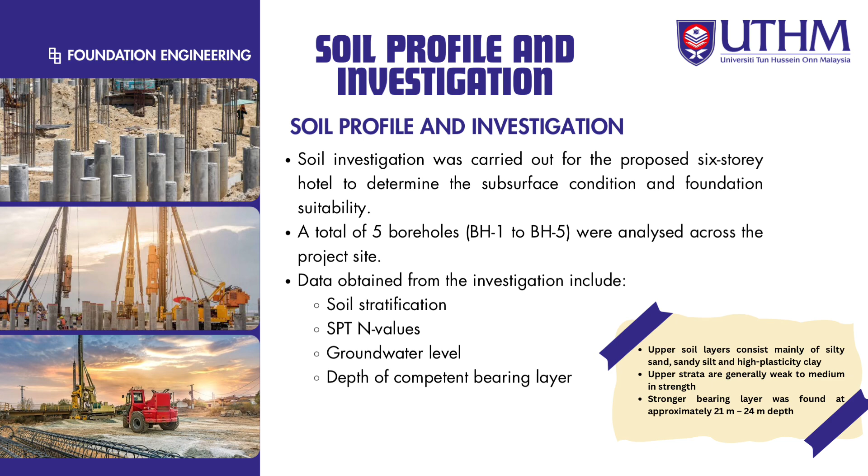A competent bearing layer was identified at a depth of approximately 21 to 24 meters, making pile foundation the most suitable option for the project.

This slide shows the column load and foundation layout. The 6-story hotel is supported by a pile foundation system, with structural load transferred from the column to the pile cap and then to the pile. There are 25 columns with loads ranging from about 755 kN to 5714 kN. To simplify the foundation design, these columns are divided into 4 load groups, labeled P1 to P4.

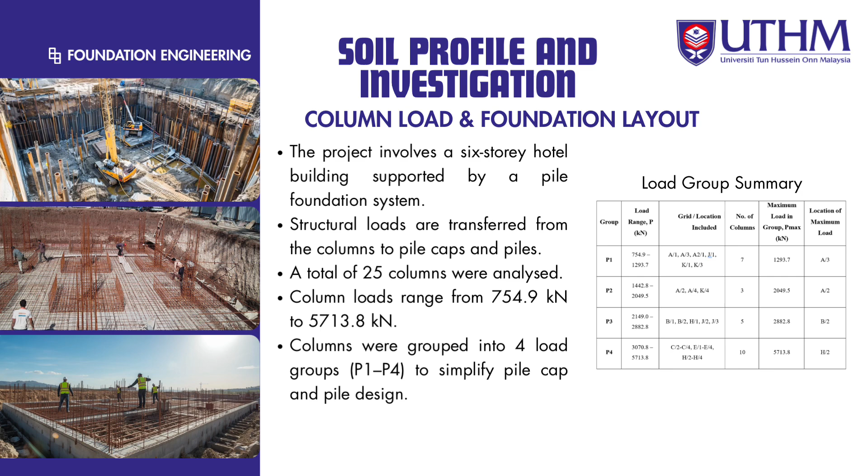This slide summarizes the borehole results. The boreholes show that the site consists of topsoil followed by silty sand, sandy silt, high plasticity clay, and finally dense to very dense sand or gravelly sand at greater depth. Some boreholes record low SPT N values in the upper layer, indicating weak and compressible soil.

However, the SPT N value increased to 50 at deeper depth, confirming the presence of a strong bearing layer. The competent bearing layer was encountered between 21 and 24 meters, which supports the selection of pile foundation for the project.

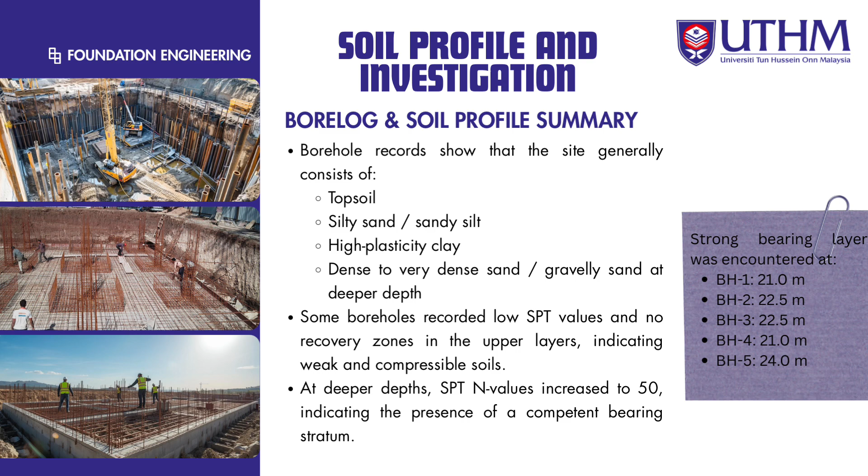On this slide, I will explain the design methodology used for our pile foundation. We selected the Meyerhof method for sand because the site investigation showed that the pile will be founded in dense granular soil. This method calculates the ultimate axial load capacity of the pile by considering two main resistance components.

The first is the end-bearing resistance Qp, which is developed at the pile tip, and the second is the shaft friction resistance Qs, which acts along the embedded length of the pile.

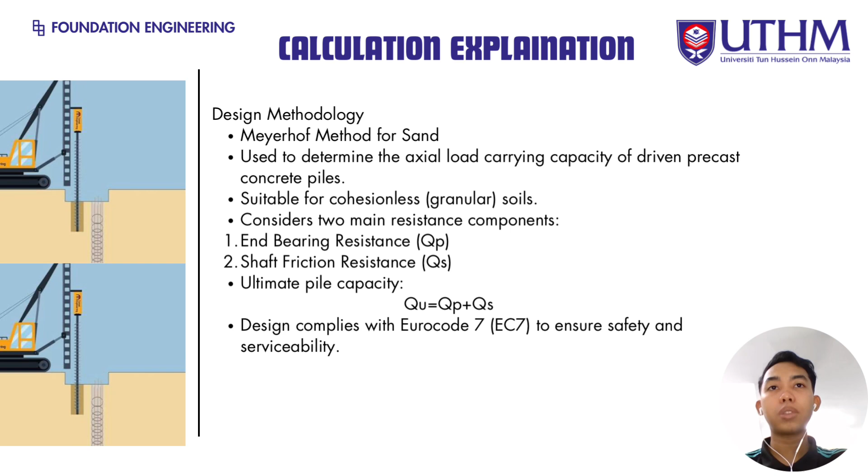The total ultimate pile capacity is obtained by adding these two values, where Qu equals Qp plus Qs. In addition, the design follows Eurocode 7 to ensure the foundation satisfies both safety and serviceability requirements. Next, I will explain how the ultimate end-bearing resistance or Qp is calculated.

The equation shows that Qp depends on the pile base area, the effective overburden pressure at the pile tip, and the bearing capacity factor Nq star. However, the calculated value cannot exceed the limiting end bearing pressure, which is determined using the second equation. This limiting value depends on the atmospheric pressure, the bearing capacity factor, and the soil friction angle. This parameter helps ensure that the pile toe is not overstressed and that the foundation design remains safe and reliable.

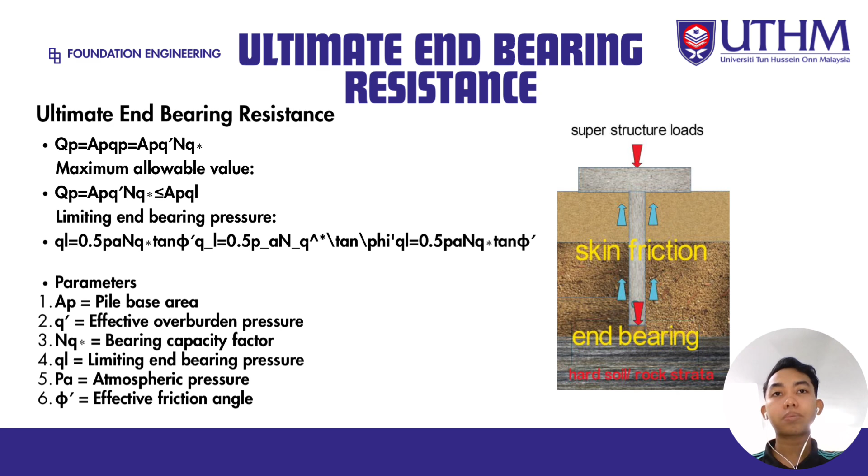Next, I will explain the general bearing capacity equation. This equation is used to evaluate the ultimate bearing capacity of the soil. The equation consists of three components, which represent the contribution of soil cohesion, effective overburden pressure, and the unit weight of the soil. It also includes shape factors, depth factors, and inclination factors to account for the actual foundation geometry and loading condition. By combining all these parameters, the equation provides a more realistic estimation of the soil bearing capacity, helping engineers design a foundation that is both safe and economical.

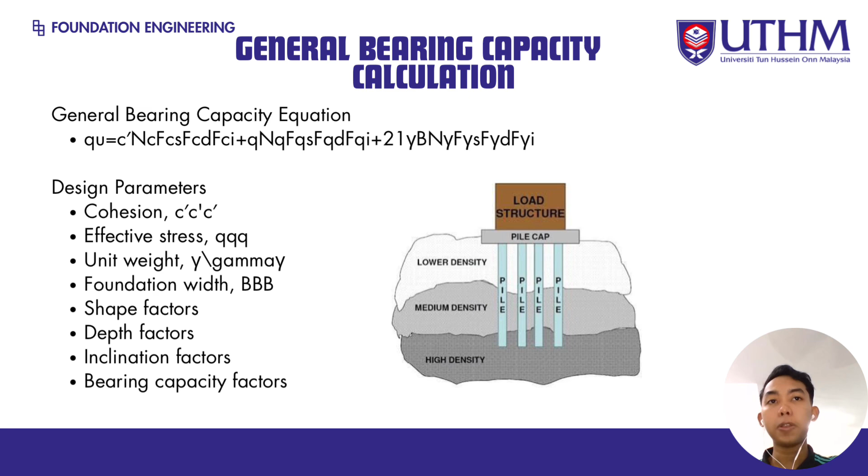Next, I will present the foundation engineering calculation for the proposed six-story hotel. The purpose of this calculation is to design a safe and efficient pile foundation based on the column load and soil investigation result. The design process includes pile selection, pile capacity analysis, pile cap design and settlement verification.

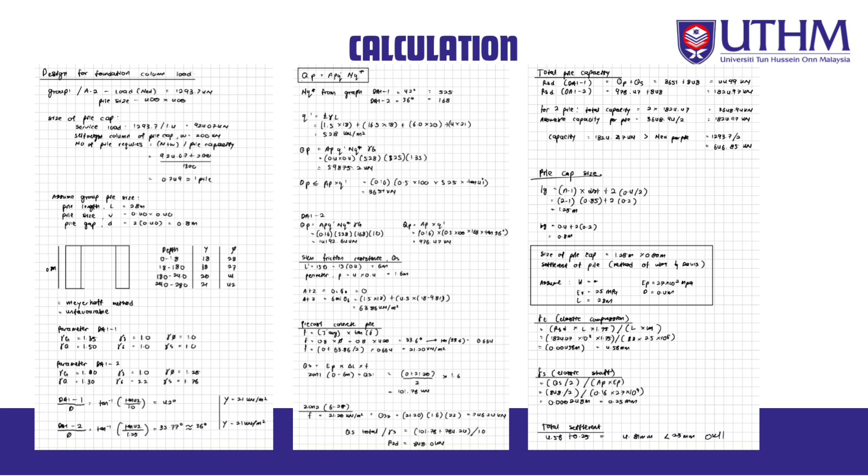This slide shows the pile design calculation. The selected column has a factored load of 1293.7 kN. By dividing it by the load factor of 1.4, the service load is 924.07 kN. The required number of piles is then calculated; although the result is less than 1 pile, 2 piles are adopted to provide sufficient load capacity and improve lateral stability.

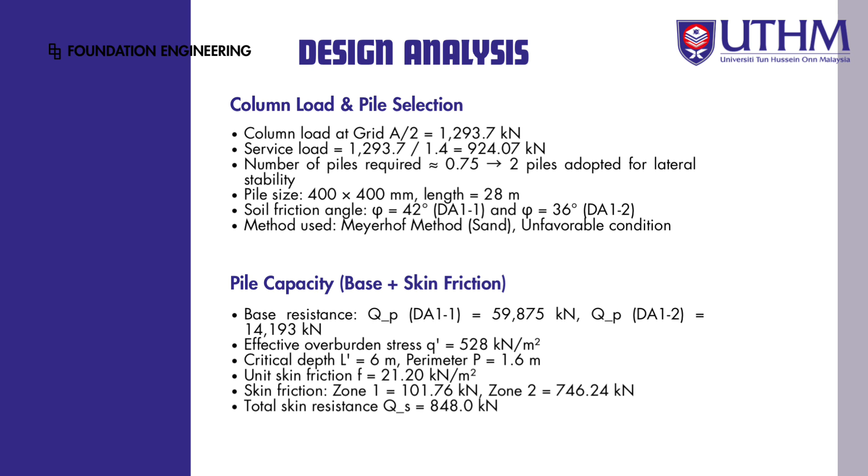A 400 mm by 400 mm precast concrete pile with a length of 28 m is selected. The pile capacity is calculated using the Meyerhof method, considering both base resistance and skin friction under the unfavorable design condition.

Finally, the design is verified by checking the pile capacity and settlement. The governing pile capacity is 1824.47 kN, which is greater than the required load of 646.85 kN. This confirms that the pile has adequate capacity to support the structure. The designed cap has a dimension of 1.25 meters by 0.8 meters.

The settlement analysis using the Poulos and Davis method gives a total settlement of 4.81 mm, which is well below the allowable limit of 25 mm. Therefore, the proposed pile foundation design is safe and satisfactory.

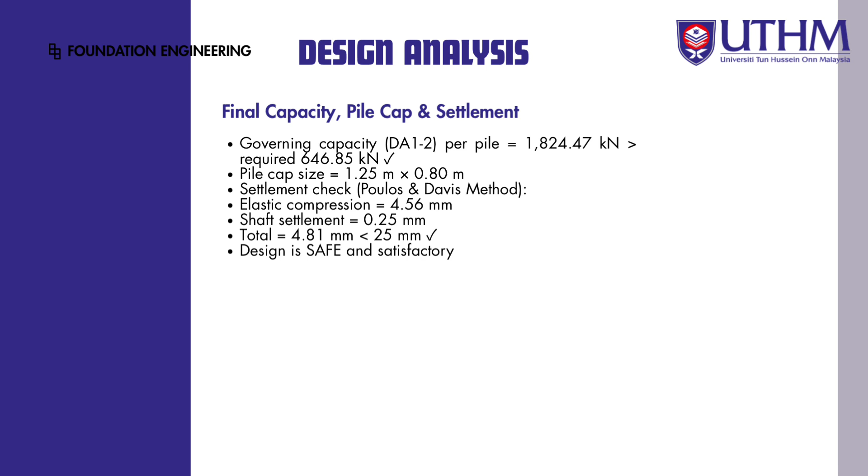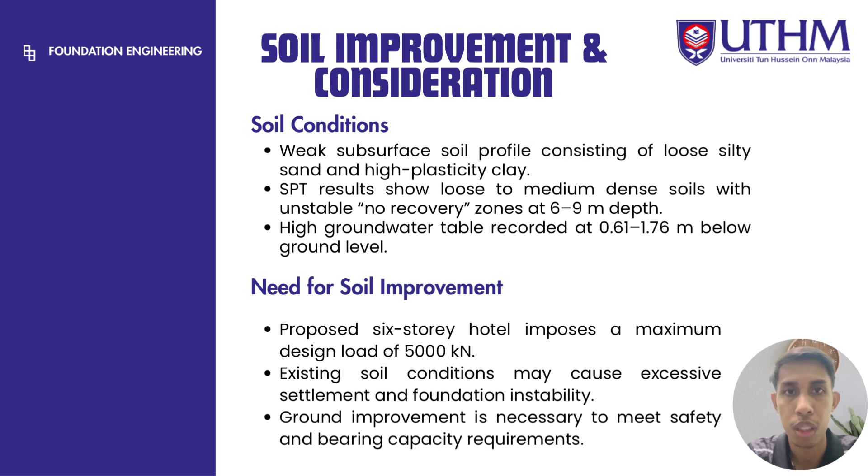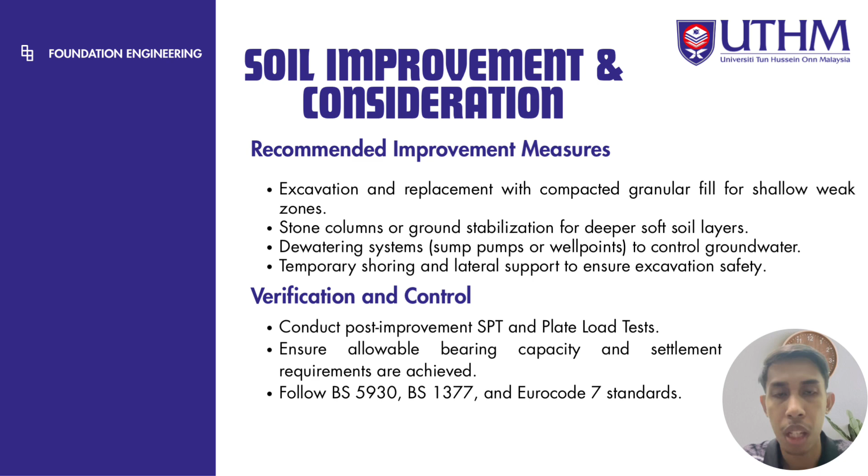The recommended soil improvement methods are excavation and replacement, stone columns, a dewatering system and temporary shoring. After the improvement work, SPT and plate load tests should be conducted to verify that the soil meets the required bearing capacity and settlement requirements. This slide explains why we selected a pile foundation.

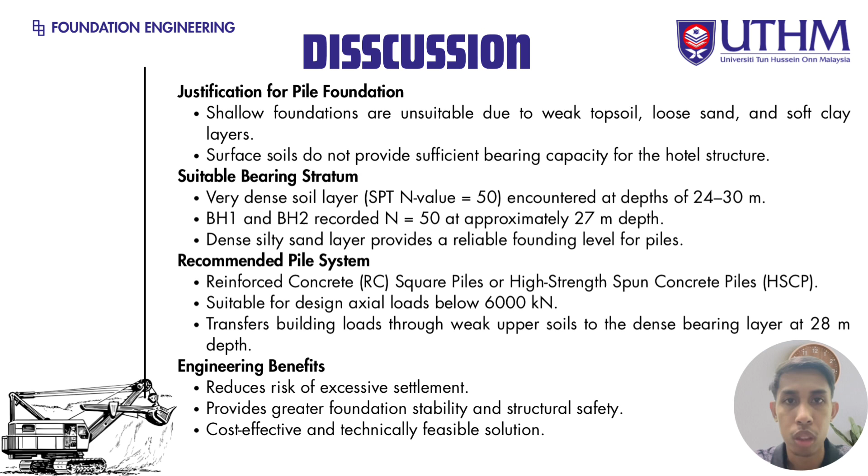Shallow foundations are unsuitable because of the weak upper soil. The bearing layer with an SPT N value of 50 is located at around 28 meters. So RC square piles or spun piles are recommended to transfer load safely and reduce settlement.

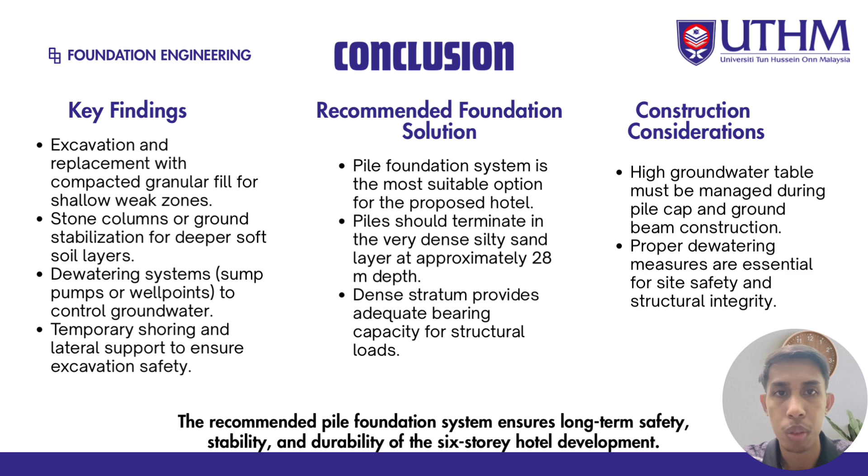In conclusion, due to the weak soil and high groundwater level, soil improvement and a pile foundation system are recommended. This solution provides adequate bearing capacity, minimizes settlement and ensures the long-term safety and durability of the 6-story hotel.